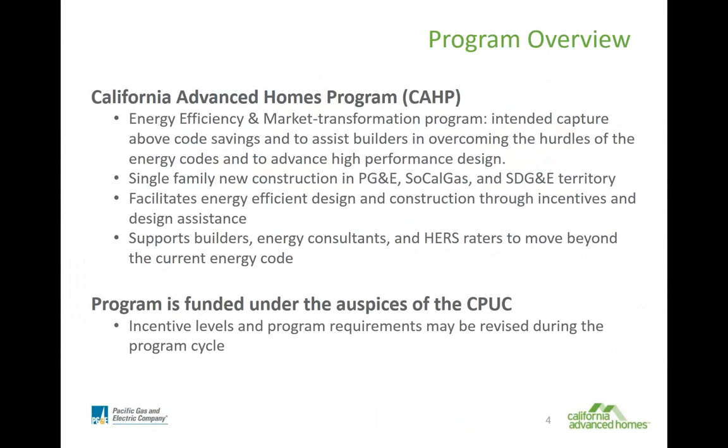CAHP is the single-family new construction program that offers incentives to builders for building more efficient and energy-conscious homes. TRC also implements a multifamily program with the same goals, known as the California Multifamily New Homes Program, also known as CMFNH. The programs are developed to help participants prepare for code changes and to strive for zero net energy. They are funded under the auspices of the California Public Utilities Commission.

To qualify for the program, a project must be within PG&E territory for gas and/or electricity. You must be going above Title 24 Energy Code, and the homes must be single-family, duplexes, or townhomes. Energy consultants that participate in the program must hold a 2013 or 2016 residential CEA certificate.

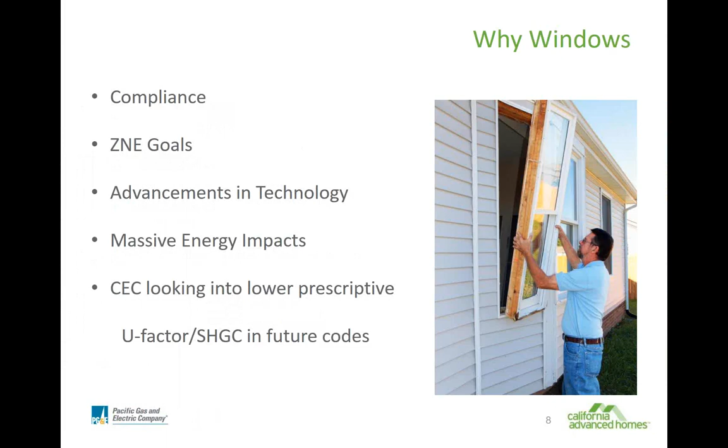All right, so now a brief history of windows and where we've come, how we've got to where we're at. Until the energy crisis in the 1970s, most windows were single glazed. With the energy crisis came the adoption of dual pane windows, and in the early 1980s, through Department of Energy funded research, low-E, or low emissivity coatings, were developed. By 1989, the National Fenestration Rating Council was formed with the mission to standardize windows thermal performance ratings and labeling. By the mid-90s, low-E glazing reaches greater than 50% of US sales.

Now we fast forward almost 30 years to 2017. Low-E glazing still holds the main market share. They have truly saturated the market at 96%, and that only leaves 2 to 3% of the market share with high efficacy or high efficiency windows. So that's something we want to see if we can make a change in the next few years in that number.

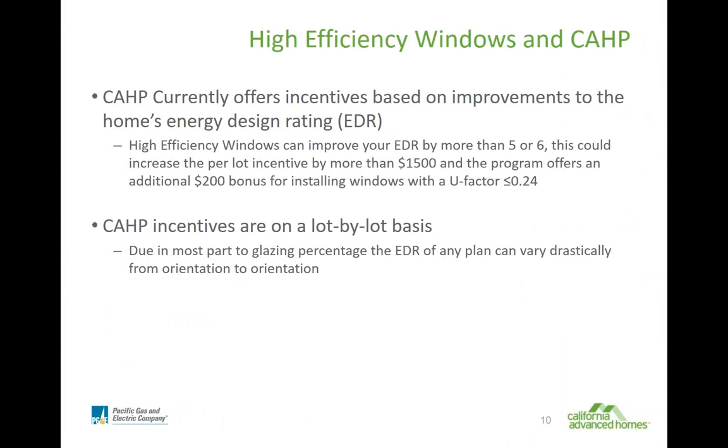And another major bonus of the windows in the current program is that CAHP incentives are now paid on a lot by lot basis, due in most part to glazing percentages on various faces of the building. Certain orientations are going to have a much better delta EDR score than other orientations, and the windows will help negate that effect, because the majority of that effect is caused by the heat loss through the windows.

So now I'm going to talk a little bit about the effect on compliance of the windows. So in this chart, you can see the baseline energy use of a home. We took 4 different homes with 6 different measure packages, and we ran them all with high efficiency windows, and then we ran them all with baseline windows. So what you see is the difference in the averages in each climate zone. And as you can see, the compliance margins range anywhere from a half a point of compliance all the way up to nearly 14 compliance points.

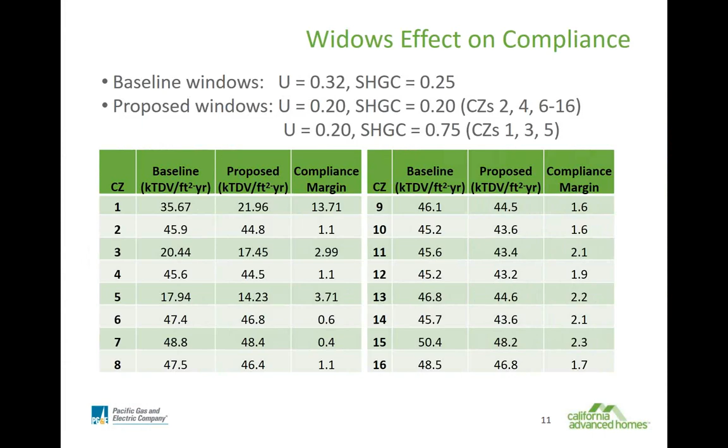And the windows that we ran for these, in every climate zone except for 1, 3, and 5, is a 0.20 window—0.20 U factor and 0.20 solar heat gain. And then in 1, 3, and 5, where a higher solar heat gain is more appropriate due to the heavily heating needs in those climate zones, we run a solar heat gain factor of 0.75. These numbers were actually given to us by the CEC, and these are the values that they are possibly looking at for future prescriptive values in one of the future codes.

So now, I'm going to talk a little bit more about the incentives for the windows.

So windows are what we consider a hybrid bonus. So what that means is windows are modeled, so they receive a performance incentive just naturally in the model that will help either to get into the program or will help raise your incentive if you already qualify for the program. So you get that added incentive to your entry level, and then on top of that we offer a $200 bonus for single family homes, and we offer a $75 per unit bonus for multifamily homes in the CMFNH program.

Those cash bonuses are for the current 2017 program year. We are currently doing some more in-depth research into these windows, and that bonus may be changing to $1 per square foot in 2018. So please hold on that one.

Next slide, we're going to look at the true value of performance windows in the program. Actually, let's just launch our poll real quick. We want to know if anyone has ever installed triple pane windows before, if you've considered doing it, or if you've never thought about it before. I'll give you guys a few moments to respond to that question.

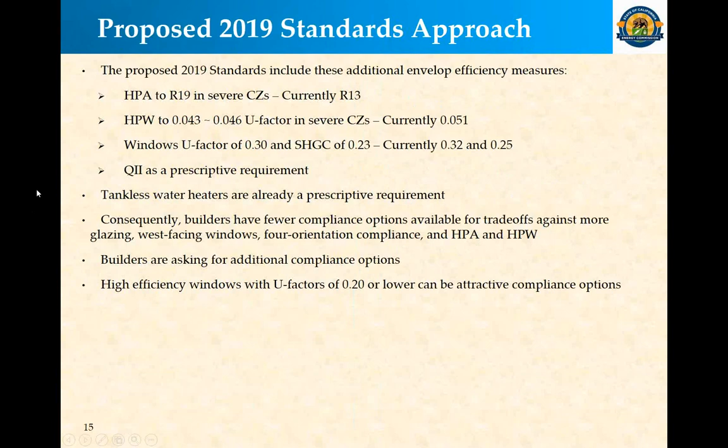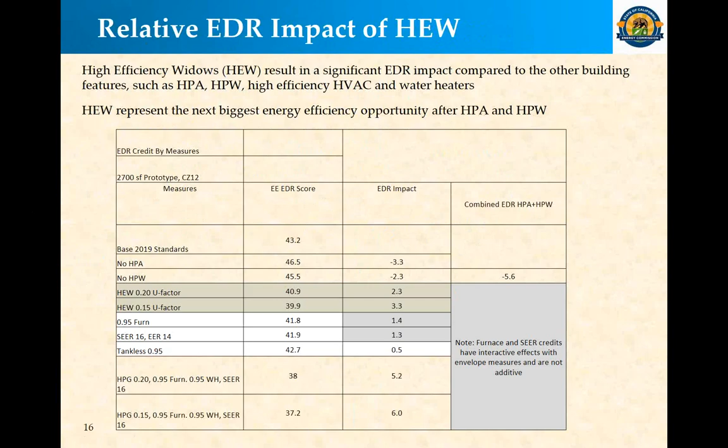I think that's just what he's trying to show here, the fact that although we want you to do all of these measures, windows are a viable trade-off for some of these more advanced construction measures that some builders tend to want to shy away from.

So currently, high efficiency windows are available through several manufacturers. There are several Energy Star partners in California that are producing these windows currently. The costs are higher, but we think with the compliance that you're getting and the incentives that are offered, they're still reasonable. As we push adoption, as my panelists will speak to, the price of these should drop pretty drastically.

And hopefully we'll have some additional incentives available in the coming years to help spur that along.

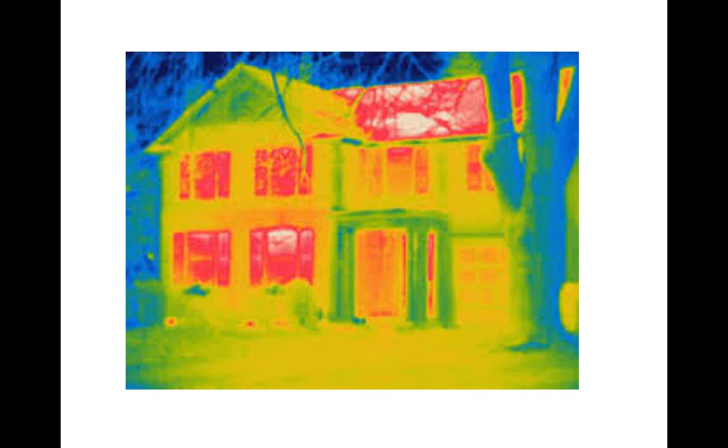So I guess I got to start out with why are we doing this. Nick touched on it a little bit, and I'll reinforce it here. We look at this and say, well, there's a lot wrong here. There's a lot of problems with the envelope, not just the windows, but the roof is pretty bad. You can see the garage door and everything else. Go ahead and go to the next slide.

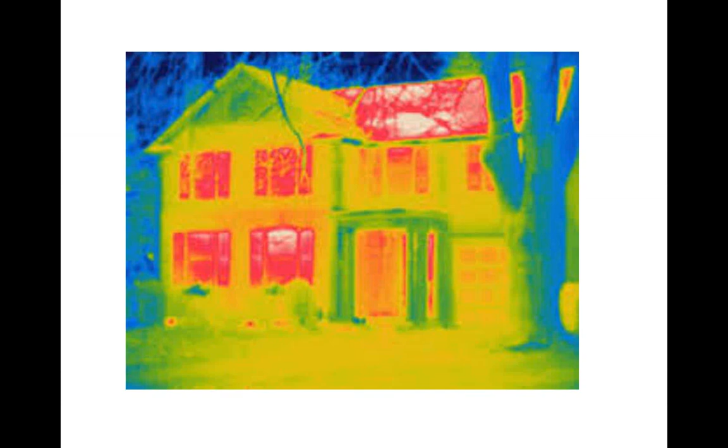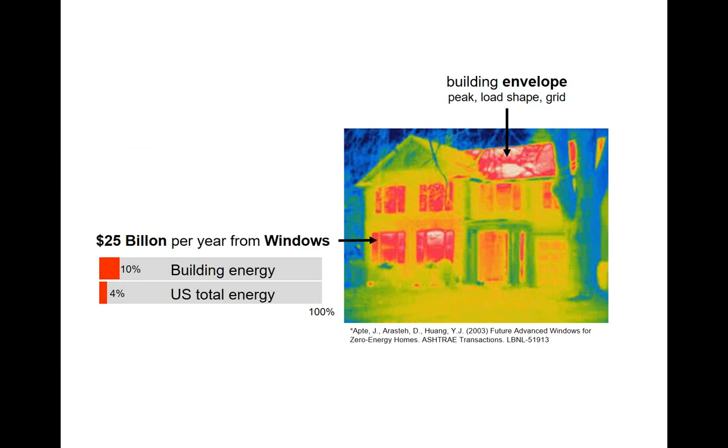The building envelope affects peak load, the load shape, the grid, and really what we look at is something like $25 billion a year, and that's just from the windows. Of course, all the other parts of the envelope make a big difference. It translates, like Nick said, to 10% of the building energy, 4% of total U.S. energy.

What LBNL does is we really focus on this right end of this figure I've shown here. This is basically annual energy use for a typical home, this one in Minneapolis. What I did is separate out the baseline building energy, so everything else through the envelope and HVAC system is in the dark gray, and all the energy associated with the windows is on the upper half and the light gray on the left-hand side.

So what you could think of as a typical window on the market right now is this double clear window. You can see how much percentage the window uses compared to the rest of the envelope. The typical window being sold now, like Nick said, greater than 90% of windows, the basic code minimum and Energy Star window right now, is this double low-E, and you can see it makes a big impact, basically cutting that window energy use in half.

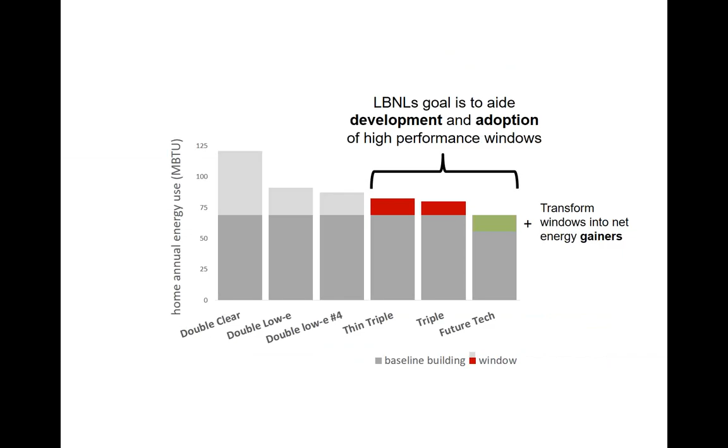So we're looking at development and adoption of how do we get these windows out on the market, and ultimately in that future tech version, we're looking at how we can transform windows from an energy user into a net energy gainer. So along with all the other building research lowering the baseline energy use outside of windows, how can windows make an impact in that baseline as well? Let's go ahead to the next one.

Just to look at some of the funding coming into this field, as a DOE national lab, the majority of our funding is through the Department of Energy. I've highlighted that if you follow the green bars down, where most of our funding falls under is this Emerging Technologies Division. There's quite a few projects being funded through Emerging Technologies that are windows related, and I've listed the current active projects here. If you're interested in any of these, the presentation is available in the slides.

I provided the links here. You can click on any of these and find out more information and more details on all these different projects.

I highlighted or bolded some of the LBNL specific ones, where core LBNL and NREL funding keeps our specialized labs running. We have quite a few labs that really aren't practical for a commercial testing laboratory to have, but for a research facility developing these windows and developing the standards in our software used for NFRC rating, they're very important to have. So DOE helps fund that through the core funding.

Some additional projects: the AERC, which is Attachment Energy Rating Council, which has been going on for a couple years. It's basically the NFRC, the National Fenestration Rating Council, if you're familiar with that. This is basically the same thing being developed for attachments.

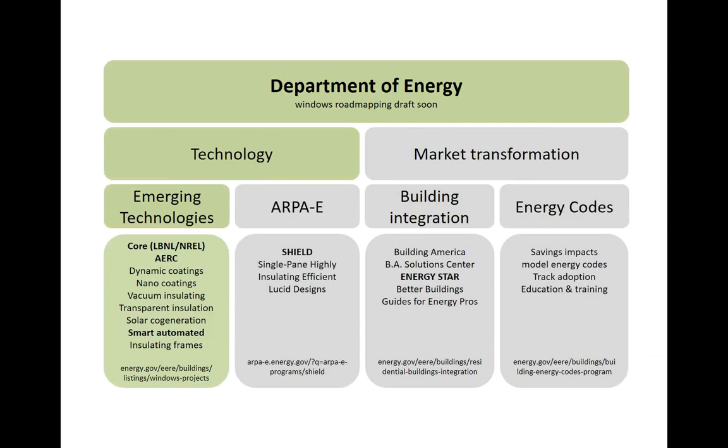Of course, DOE isn't the only one doing any funding here. Just mentioned Energy Star—EPA runs the Energy Star program, and then Energy Star Most Efficient program for windows has been introduced in the last few years, incrementing the performance of Energy Star windows.

California, since a lot of us are from California here, we're very aware of the net zero goals for 2020, and then EPIC funding. Some of this work I'll be talking about today for project specific is partially funded by the CEC's EPIC funding. So California is definitely very involved in this area as well.

And nationwide, utilities through CEE, the Northwest Energy Efficiency Alliance as well. NEEA has done a lot of funding in this highly insulating window area.

And just to follow up, it's of course not just the US, but the world. Northern Europe's standards are almost baseline now as triple pane windows. But even in North America, NRCan has just introduced their goals for U factors of windows. You can see these aspirational goals they have: 0.28 for 2020 and 0.14, so an R7 window, by 2030. These are pretty strict requirements—of course, you can't meet these goals with just the standard double panes we have on the market today.

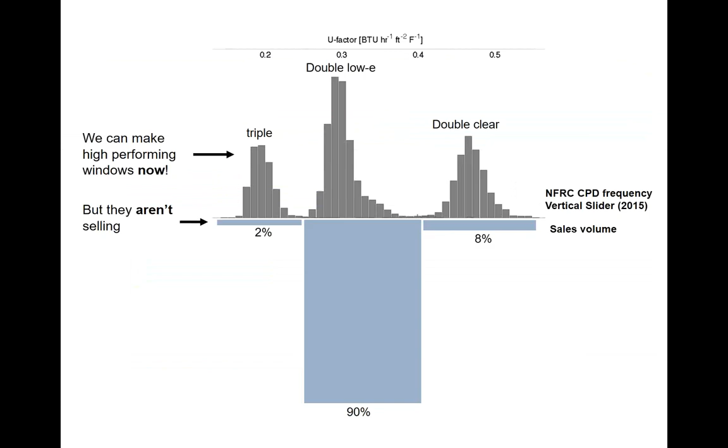So why aren't these windows selling? That's the big question we saw in the poll—you guys aren't installing these, manufacturers don't want to build them. So what does the industry say about why these windows aren't selling? The typical response we've been getting when we talk to the industry, primarily manufacturers, is...

...that they're too heavy, too wide, there's no demand for them. And I guess that goes along with the others, that they're too expensive, the return on investment is too long. Really, after talking to so many of these folks and learning how they have everything set up, I have my own translation to what all this means: it's that they're too invested in their current designs.

They're very well set up for building their standard double pane low-E window that they've been doing since the 80s or late 80s, early 90s. They do it really well, they put a lot of money into these designs, and they don't want to change. And of course, the second reason is that it's not required, so it goes along with the same idea—they don't want to change. So if you don't have a reason to build a better window, why would you do it?

So that's kind of what I'm going to talk about now—how do we do it? What's the roadmap for getting us from this typical double pane low-E window to something better? I'll go through an example of a project we've recently started, which is this thin glass triple IGU.

Nick talked about the kind of market adoption, or how we went from a double clear to a double low-E, which roughly translates from an R2 window to an R4 window. The thin glass project we're working on now is, how do we go from an R4 to an R8?

So what we want to do is follow that same market adoption process—the same process that was so successful with the double clear, trying to implement that same approach for this thin glass triple.

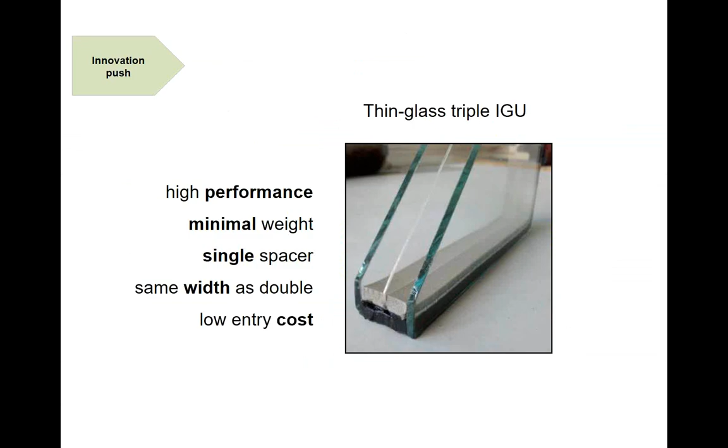Thanks. And of course, this is such a good idea that we thought about it 25 years ago. You can see this patent disclosure from Selkowitz. Stephen Selkowitz, who recently retired, led our program for many years, had this patent in 1991. At the time, thin glass didn't exist, so I think the drawing here is for using a polymer-type unit for the center glazing, but the ideas are the same. So this idea has been around for quite a long time, but it really was before its time. The market wasn't ready to handle something like this back in 1991.

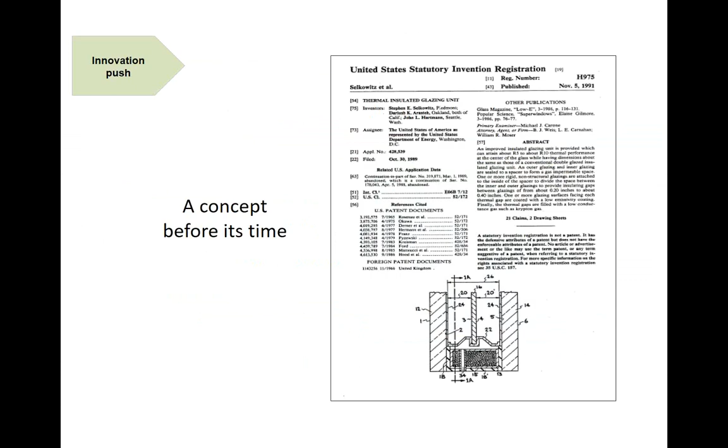We believe it is now. So go on to the next slide for me. Thanks. So why is it going to work now?

Besides 1991, in 2012, we thought at the time that with this big influx of thin glass hitting the market for big screen TVs, cell phones and everything else, there's a ton of thin glass out there, a product finally ready to go. We attempted this sort of project back then, and in the end it ultimately didn't go anywhere. Really, because of this chart you're seeing here, at that time there was really only one supplier of thin glass - everyone knows Gorilla Glass and Corning - and it was quite expensive. For TVs and cell phones it's a very high margin business. That doesn't work with windows. There's a lot more square footage per product - you can't have this high margin. So it ultimately was just too expensive.

Add that with the cost of Krypton gas. When we do these thin triple glazings, you really need to have this Krypton gas fill, because we're making the gap width suboptimal, and the only way to counteract that is to use the Krypton gas, which brings us back into a more optimum gap width for the gas. So at the time, the Krypton gas was also quite expensive. It was heavily used in halogen lights.

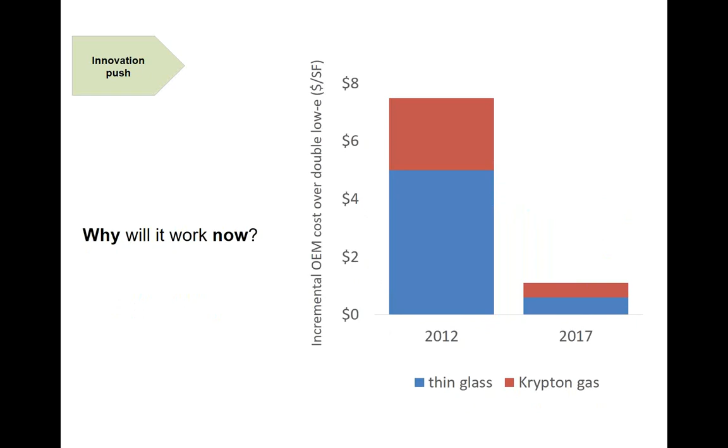And of course, since that time, the LED market has really taken off. The market has dropped out for the use in lights. It's a commodity gas, so the price has dropped out as well - the price for Krypton gas is very low now. And since then, the thin glass market has ballooned. There are many manufacturers making thin glass all over the world. They're looking for new markets, and the margins aren't as high as before. We're looking at prices of $5 a square foot before, down to 60, 70 cents a square foot now for these glasses. So I think this chart really explains why we think now is a good time for this product.

And of course, what that means with that drop in price is that we can show a payback. So that big concern for window manufacturers is there's not an ROI. Well, now we think that we can see one in the future.

And this really applies to all climates, not just cold climates like Minneapolis, or Tahoe in California. I have one bar here for California, kind of purple, which actually has the quickest simple payback - that model is for Los Angeles, LAX weather data. How can it possibly have the quickest payback in such a mild climate? It's really that electricity costs are astronomical in California, compared to Minneapolis or throughout the rest of the country. Air conditioning electricity costs are so high that using these high energy efficient windows can actually have even faster paybacks than somewhere else.

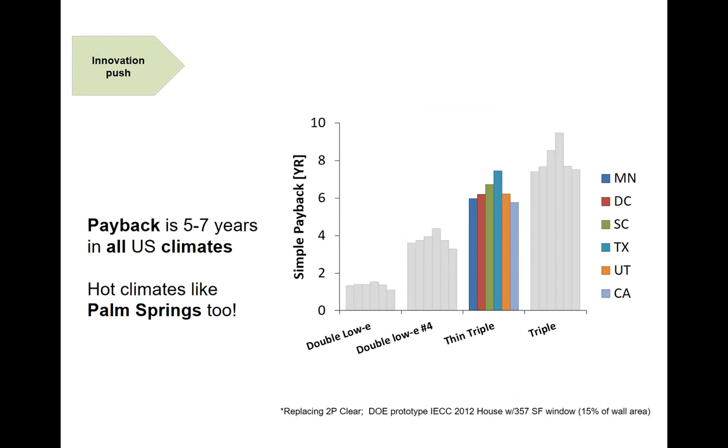Go ahead, next one. So that kind of covers the technology development and a little bit into the market pull, but there's a couple other things I wanted to bring up about these other benefits of these windows, that we really make the case to owners - and maybe those of you designing and building these buildings - the case to make to the owners of why would they want to go to something like this?

So a couple charts here. One is condensation resistance, and that's always a big concern, especially when you go to these tight buildings where you don't have a lot of air leakage. You can have moisture problems inside the buildings. Thin triples and triples, I'll kind of lump those two together, have much better condensation resistance. The inside surface of the glass is going to be warmer because you have a more insulating surface, so you have less chance of getting mold development, anything like that.

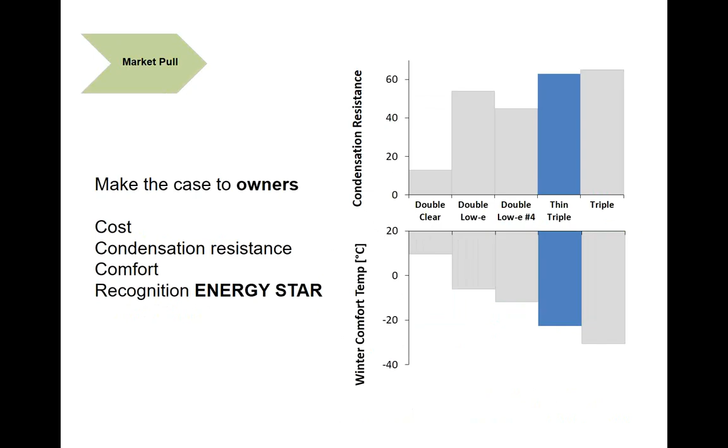So that's always a big selling point. And then, of course, comfort temperature. The winter comfort temperature in this chart going down basically is what the outdoor temperature could be while you're still comfortable sitting next to the window. So with double clear, it's obviously somewhere around 10 degrees Celsius, but triples and thin triples you're getting 20, 25 below Celsius, where you can still sit next to the window and be comfortable. And that's mainly based on the radiant temperature of the glass you're sitting next to. So this is really important for square footage of your house, or comfort in your house, being able to sit next to these windows.

I've been talking about your house and residential, but of course this also applies to commercial, and same on that last comment, being able to stick your desk next to a window. Commercial buildings more and more go to this, like this image shows, these kind of all glass facades. Gaining back that square footage next to the window is a big deal. Every square footage of usable space is important. So the case you can make to architects, engineers, and builders is that as you increase your window size by using a highly insulating window, you can decrease this perimeter HVAC.

One example that I really liked was given by Chris Mackey at Payette Architects, and this image and numbers are from him on a project they worked on: the incremental cost they got for upgrading from a double pane to a triple pane was about $5.50 a square foot. But doing so eliminated their need for perimeter heating in this project, and the perimeter heating specifically in this project was $53 per square foot. Massive savings, right? It made this a no-brainer to do.

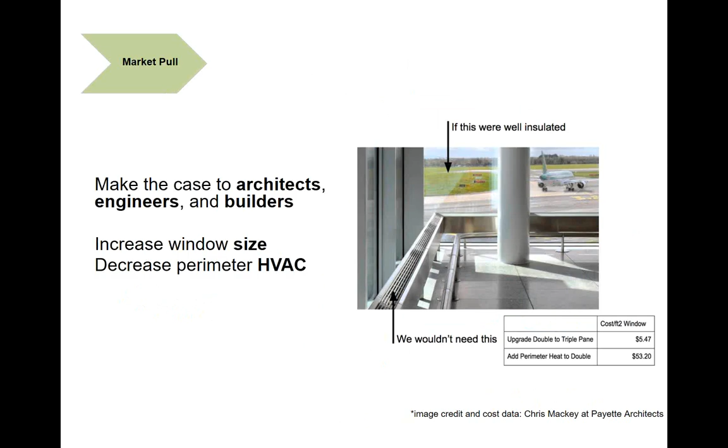So these are some of the arguments for commercial buildings as well as residential buildings. And of course, California gets more and more concerned with this duck curve, and the resilience of the grid and how we deal with these peak loads. Really anything we can do to make the building envelope more insulating, make it a more stable load, is going to help out this curve.

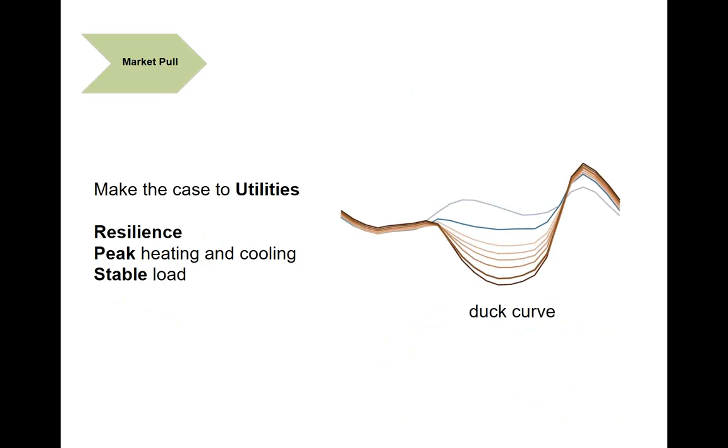So where do we go from here? This project that I'm talking about, using this example thin glass, has been going on for about a year. We've been doing a lot of this technical validation, some of which I briefly touched on here. And we're moving into more of this process with supply chain partners and window partners.

For the next year or so we're working with these two groups, kind of halfway between phase 1 and phase 2 of identifying supply chain partners interested in working with us, and window partners, both large and small, interested in these type of designs and how they would implement them into their buildings or into their products, existing products. So any large, medium, or small manufacturers, how can they bring in and work with the supply chain partners willing to supply products for these, and what would it cost for them to change their lines to build these products and get them on the market? That's where we are right now for the next year or so.

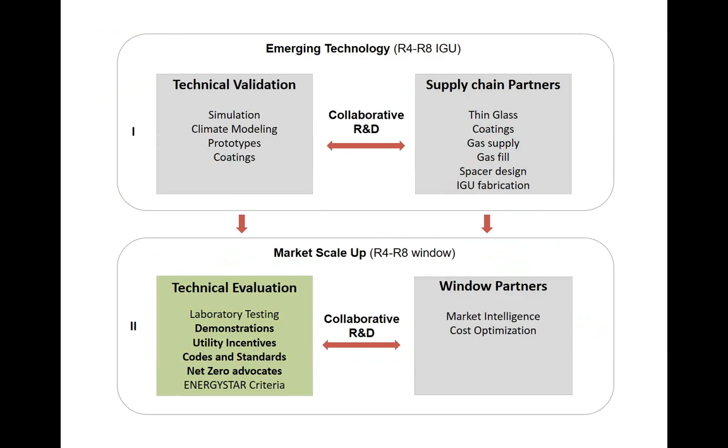So one last thing I threw in at the end: a few months ago we had the Passive House conference in Berkeley, and some folks from Passive House Germany came by our office. We talked for quite a while, and they were very confused about why triple pane windows were so expensive in the US.

One of the things they talked about is, we build triple pane windows, that's what we know how to build. So how could it possibly be cheaper? It's actually more expensive for them to build a double pane window.

This goes back to that previous chart I was showing: what's our goal here? What's the window industry going to say regarding the lack of triple pane sales, and in 5-10 years what are they going to say? Switching that curve about triple pane sales, eventually there's not going to be demand, because they're going to see that double pane windows are uncomfortable, there's condensation problems, and really they're too expensive to build.

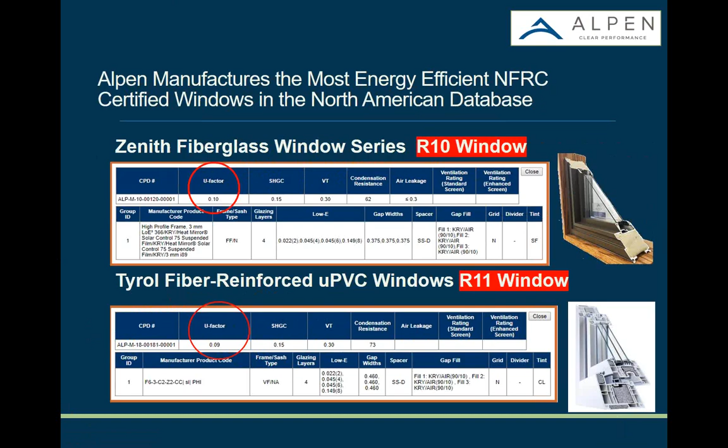How do we get to these high performance categories? With our Zenith, our fiberglass window, I wanted to show some of the elements of our product. What we do is look at every element of the window and what causes it to be higher performance. We try to optimize every element.

With our R10 window, we integrate an open back pultruded fiberglass frame, which, as many of you know, fiberglass is an outstanding insulation product itself relative to some of the other very strong, capable frame systems like aluminum. We use an ultra high performance, super insulating closed cell foam.

In our Zenith North American style series, we use a quad pane or double film 1 3/8 glazing pocket, with the latest and greatest in soft coat low E glass technologies. We use low E coated films and a number of different gas fills depending on what we're trying to do. In the R10 window, we're using Krypton. We also use a lot of argon, and we're integrating stainless steel spacers in our highly sealed IG perimeter.

So it's a combination of all those commercially available products that allow us to continually evolve. We offer a full line of products where virtually everything we do is triple or quad pane. We started at 0.20 U value and get better from there.

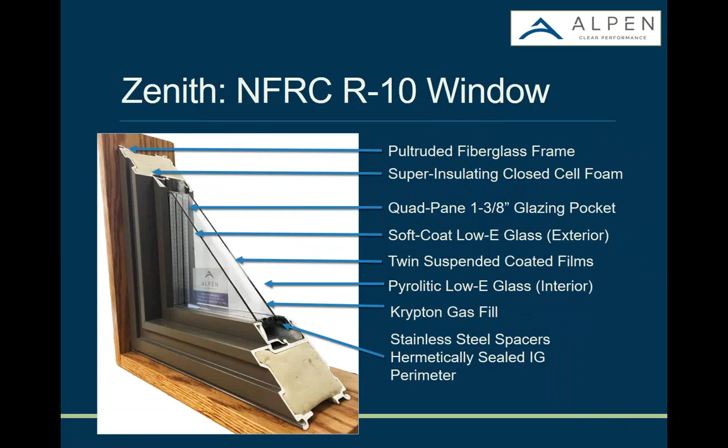Let's talk a little more about suspended coated film insulated glass, in the context of the history lesson we talked about earlier. Glass, as many of you may know, as a history and political science major I love this stuff, and I sit amazed at our federal political system these days. The Romans really innovated single glass technology in the BC era, but it was the revolutionary R2 window, first patented in 1865, that now serves as the basis of U.S. window manufacturing.

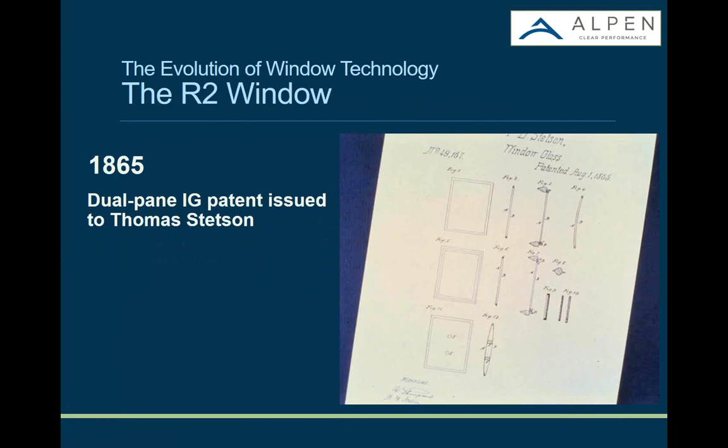Suspended coated films, interestingly, were initially developed almost simultaneously with soft coat low E, using really very similar technologies. The soft coat low E's originally developed by Cardinal Glass back in the mid 70s used very similar technology to what was developed by Southwall Insulating Glass in the same time period, with sputter coated low E deposits, in our case films, versus the more typical low E glass you'd think of. It's very much the same technology, the same development. In fact, Southwall and Cardinal Glass sued each other to figure out who was first in developing low E. My understanding is neither one won -- call it a draw.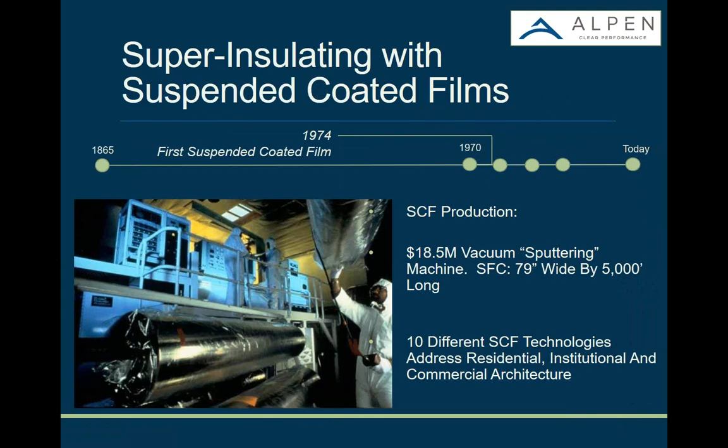What we're able to do uniquely with film is we don't have the weight of triple glass. We use suspended film that is tension leveled in a heating process to create the equivalent of triple films in a single film dual cavity product, up to quad or even quint cavities. With our tilt turn European style window, we can put up to 2-inch insulated glass units and get some really fun combinations using that wide glass.

Once again, it's the combination of using low-E coatings, suspended coated film, both on glass and in film, and gas filling using argon primarily, an awful lot of krypton, and then also occasionally xenon. Insulating gases are a very interesting subject I want to divert to for a moment.

There are many schools of thought on insulating glass units. The vast majority of dual pane insulated glass units use argon gas. Argon gas has its best performance, at least in the US, the way we measure product in the US, in a 1/2-inch airspace. Hence that's why we're seeing so many dual pane units that are 3/4 of an inch to 7/8 of an inch typically, because they're designed to optimize around that air pocket with argon gas.

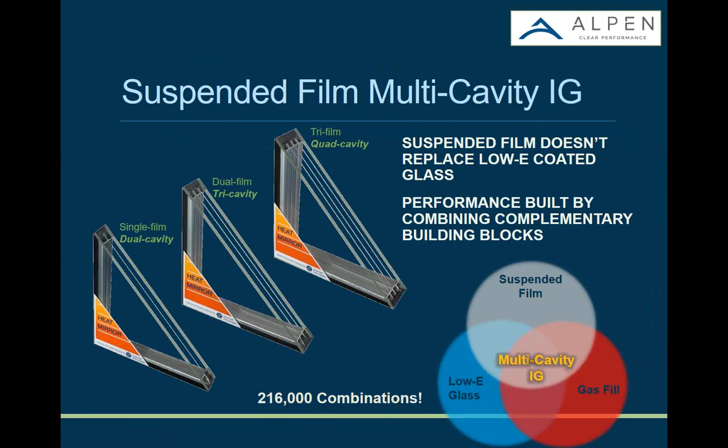It's a very interesting world. Xenon optimizes in a 1/4-inch airspace. It's kind of a crazy, funky, wildly priced and swinging gas. It's used in outer space exploration and other things like that. But after 1865, 150, now almost 160 years later, we finally have readily available and widespread manufacturing ability to offer triple and quad pane super insulated windows.

I want to go back to one of Robert's slides that we're going to talk about more in a moment. People think about triple pane as not being readily available. I really want everybody to understand this because it absolutely amazes me. But virtually every single major window manufacturer that I'm aware of, having gone back and recently researched this, has triple pane options readily available in their product line right now today. They not only can make them, but they have windows that can supply U values sub 0.20. All of them do, many versions of them.

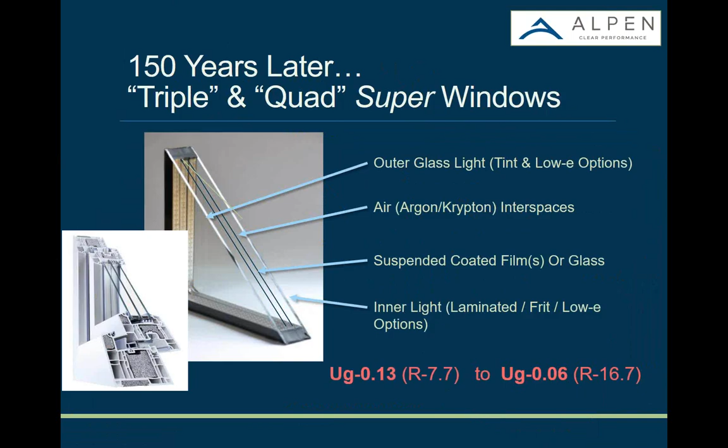Suspended coated film sounds techy. Is it really a niche? No, not at all. It was co-originated with low-E glass decades and decades ago. More than 250 million square feet of suspended coated film has been installed in North America by many fabricators, but I think Alpen is a leader in that area, and hundreds of thousands of projects. The entire Empire State Building has suspended coated film. The award-winning Packard Foundation, one of the highest performing buildings in the world, headquartered in Los Altos, has suspended coated film. Spectacular building.

We just finished supplying windows to Boulder's Commons, a net zero spec commercial building built here in Boulder, has our windows and suspended coated film. We have our product in the Davis Research Station, occupied by Australia in Antarctica, and we also have our product at the highest point in Greenland.

Sounds fun, sounds interesting, but the vast majority of our product goes down to everybody on Main Street, USA. Although we have the great luxury of going into a lot of really fun projects throughout North America, our core market is homes and buildings all throughout North America, much like the ones you'll go home to tonight, whether multifamily or single family home, not necessarily the huts, but it's a very widespread adoption.

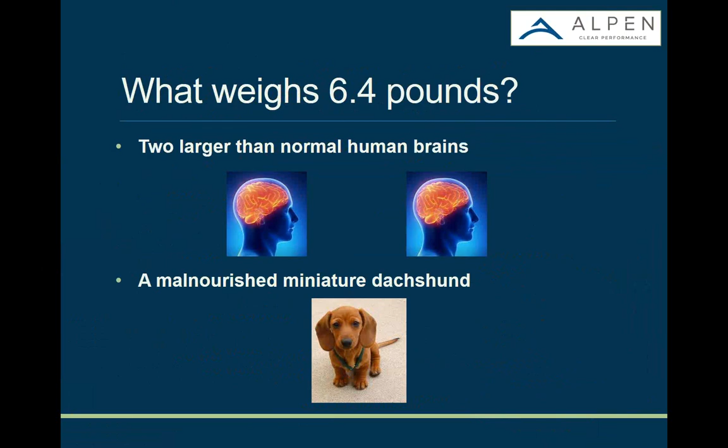Robert alluded to it earlier and we couldn't agree more: why don't we have more low-cost U.S. manufactured high-performance windows in the marketplace? They're readily available in Canada, and they're readily available, in fact the standard, in Europe. But when you go to U.S. manufacturers, everybody can make them, but particularly some of the larger name brands that are leaders, that dominate opinion and dominate who's going to lead first and who's going to produce what, they don't do it.

There's no carrot, there's really no upside. We talked a little bit about California incentives recently - those are phenomenal. What's going on in California is phenomenal, and it gives us great heart when we look at some places in the United States, including out here in the Rocky Mountains, New England, the Mid-Atlantic, but particularly along the West Coast, Pacific Northwest, and especially the leadership California is providing with incentives and carrot. It's just not that big, but more importantly, nobody makes them do it. Everyone's content with Energy Star performance, which you can easily achieve with dual pane performance.

When there was a move to move Energy Star in colder weather climates to a higher performance standard, it was as if the sky was falling relative to the lobbying that took place to make sure that wasn't happening. There was really no dollar reason for people in the mainstream to vary from what works well.

Rebate incentives do work in northern Colorado. We have some phenomenally innovative utilities and municipalities - Boulder, Fort Collins, and other areas out here - and we know rebate incentives work. We join a lot of projects taking advantage of incentive rebates, and they're frankly fairly significant, as illustrated by those that Efficiency Works, a collaborative of 5 local utilities, offers out here.

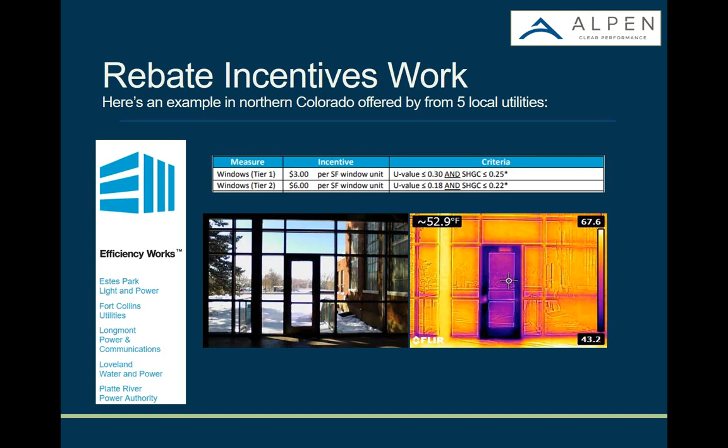Thanks, Brad. And I want to thank Robert as well. Just a couple thoughts before we start taking questions. Going back to Robert's slide about the carrot and the stick - as I discussed earlier, the incentives are there. They may be getting a little more robust soon. As far as the stick goes in the codes, code is moving towards these more efficient windows.

The other thing we really didn't touch on during this presentation that really needs to be taken into account, especially in the residential sector, is the sizing of your HVAC system. These windows will lead to a smaller HVAC system, which is less first cost for the builders. And the other savings goes back to one of the slides Robert had on the commercial building with the heat around the perimeter - that's even true in residential.